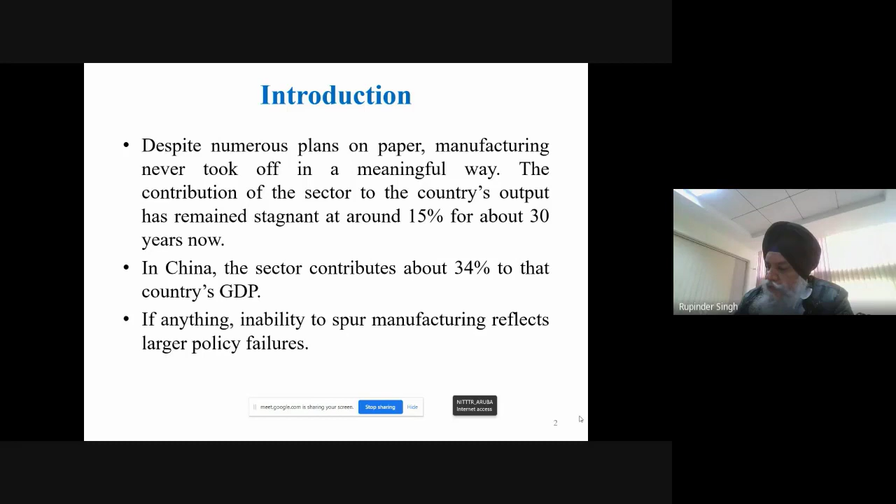And if we compare our country with China, the contribution of the manufacturing sector in GDP is around 34%. And the problem is not new. A lot of efforts have been done, but still from past so many years this problem is there. And what the website says, the Planning Commission of India, now called NITI Aayog, says there seems to be some policy failure. Actually, to overcome this, the Atmanirbhar Bharat concept has been there.

In 2004, Government of India set up a National Manufacturing Competitiveness Council, which was headed by a group of ministers. And in 2006 itself, the Prime Minister of India at that time also put his concern that the contribution of the manufacturing sector must increase from 12-14% to 25-35%.

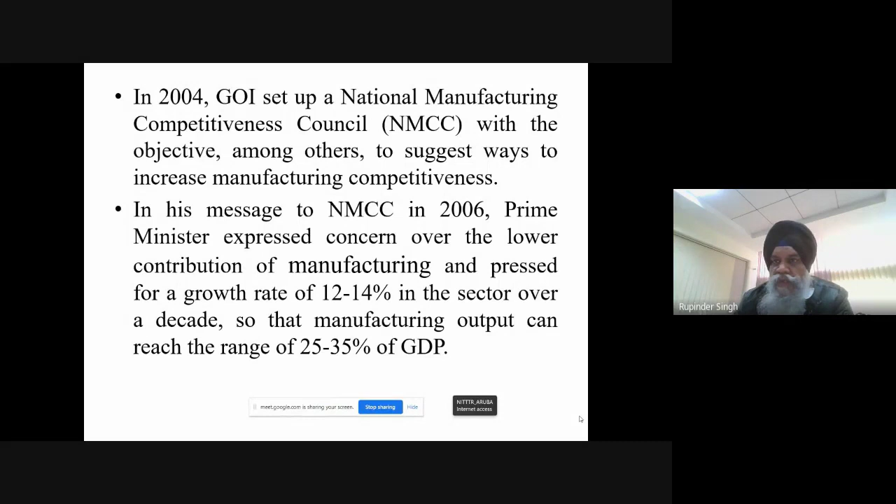And if I just Google the website, you will see that the target by Government of India for 2025 is around 25%, and still we are at 15%, right? So we need to work really hard to achieve this, right?

If you just compare in past 10 years or past 20 years, the situation is not improving. And why do we need this? If I am able to increase the contribution of the manufacturing sector from 15% to 25%, there will be 100 million jobs, specifically for the technocrat, right?

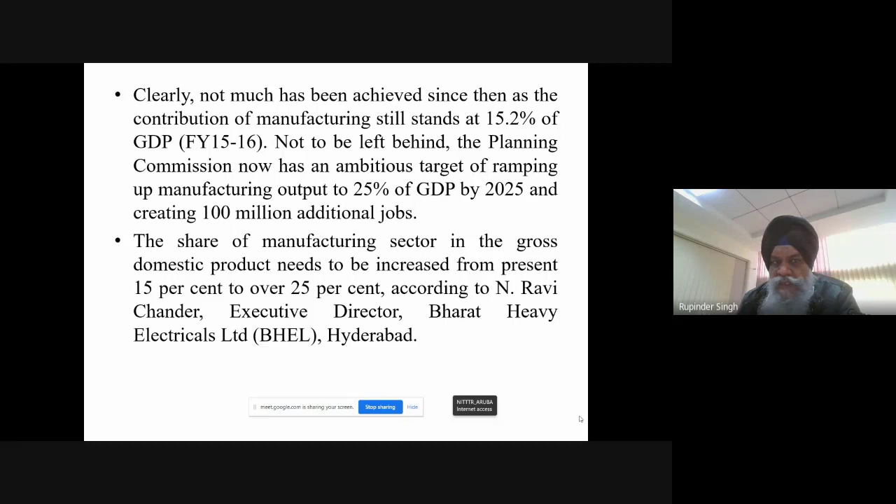So that is also one of the major concerns in our country. The job scenario is really alarming, and after this COVID period, a lot of things have to be improved. Even not only the government sector but also the private sector people are focusing that we need to do this. Like one quote I have put by BHEL executive director Ravi Chander, he is also saying similar things. Even some private sector people are also focusing on the same thing. Basically, we have to increase the contribution of the manufacturing sector.

That is the concern. Manufacturing sector doesn't mean pure mechanical manufacturing. It may be the manufacturing of electronic goods. We are interested in developing some sensors. We are interested in developing various medical goods and so many things, right?

But there are some issues in our country, like we have infrastructure problems, we have finance issues, we have problems with land acquisition, there are labor laws, and so many things hanging in the parliament. A lot of resettlement bills, a lot of things are pending. Now, what does this mean? Whether we should stop working, or we can have something which can help us come out of this situation.

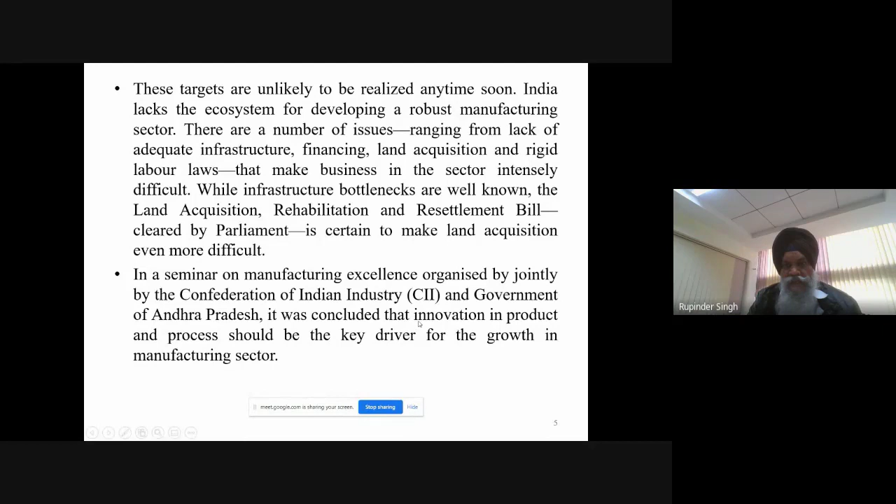So to address this issue, there was a discussion among various stakeholders, and in one discussion between CII and Government of Andhra, they came up with a very beautiful thing: that innovation in the product and the process should be the key driver for growth in the manufacturing sector. Now, this innovation in product and process...

This is basically the key point for our discussion, from where we came up into the area of veterinary. If we are able to do this, there will be ample jobs for our countrymen, and this will help us come up with a lion's share in the market.

Now, why are we discussing this? After the National Education Policy 2020 was launched, there is a lot of opportunity to work in the area of multidisciplinary or interdisciplinary research. That is what is some tool or help by the regulatory bodies in our country to think out of the box for solutions which can be really innovative, which can help in product development, coming up with new product ideas involving different disciplines of people, and then launching that product first in the market, so that it has some marketability.

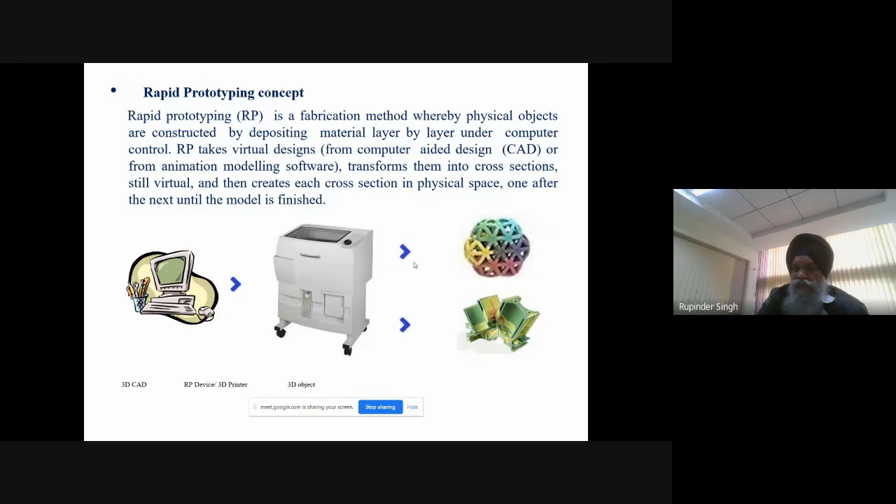So this is a fabrication method where we get physical objects constructed by depositing material layer by layer, under computer control, which is of course virtual, and I get the final object in physical space, one after another.

This is another way of understanding 3D printing: I am putting layers successively, material which may be melted or partially melted, on a build platform to get a 3D printed part. I think this is a very traditional definition, and many times we have seen this, that I am interested in building some part layer by layer.

Now, this part may be of a polymer, it may be in the form of biogels, or it may be in the form of metallic powder. The joining mechanism may use some adhesive, it may use melting through some laser, or maybe some binding action.

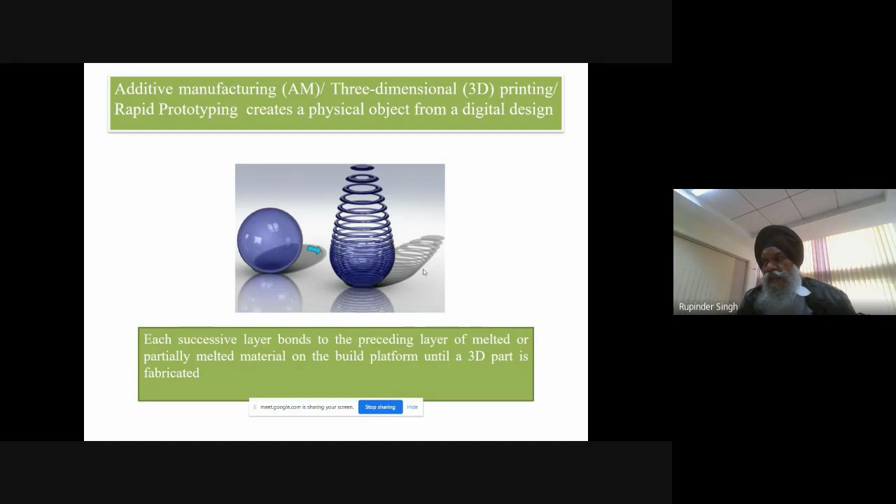Now, if I am really interested in medical applications, specifically for veterinary or human applications, there is one additional step that is required. That is basically the idea of 4D printing. I am interested in some self-actuating type mechanism which can help in the controlled growth of these types of 3D printed functional prototypes.

So to understand this, what is basic about 4D printing? I am basically printing a smart material. Now, what is a smart material? A smart material is something which can change its physical state, maybe after solidification. Here, solidification means the 3D printed part, and once I give some stimulus to it, that material changes some of its properties, and the effect of the stimulus is reversible. Giving some stimulus in some form, I get a controlled environment, and if I reverse the stimulus again, I get repeatability.

Now, to put my point in a more simplistic manner, let me give an example. All of us have seen a sunflower. A sunflower always faces towards the sun. Once there is a sunrise, the sunflower moves up. Once there is a sunset, it faces down. And as there is a movement of the earth around the sun, the sunflower also has a similar rotary movement. That is what we observe in nature. So that means there is one stimulus, the sunlight, which is basically actuating some mechanism.

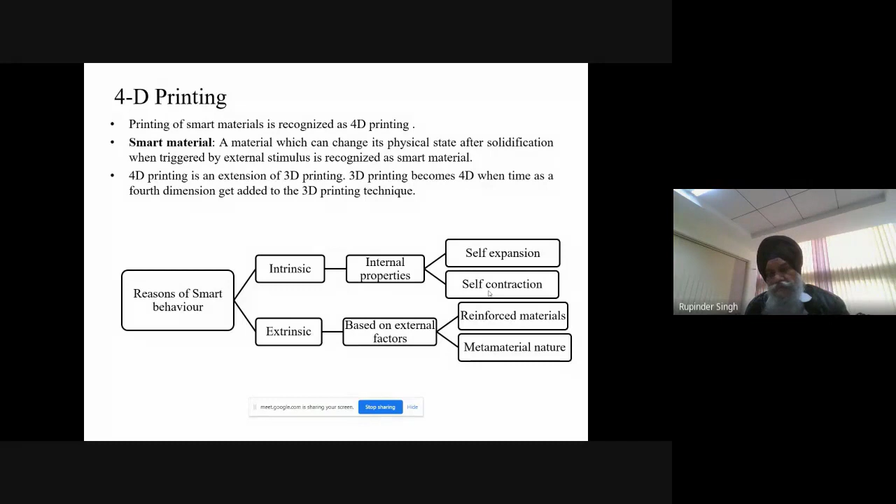So here, self-expansion and self-contraction may occur through some stimulus, maybe in the form of an electric field or a magnetic field—people are working on this. Then sometimes we are interested in adding some property from the external side, so we call it the extrinsic property. This can be through reinforcement, with reinforced materials or metamaterials. For example, if I want some electrical property, thermal or electrical conductivity in that implant, I can think of reinforcing with aluminum powder, copper powder, or graphene powder, depending on the application.

One of the recent concepts in 3D printing, specifically in bioprinting, is the use of metamaterial type structures. To understand this metamaterial structure, we have to follow some civil engineering concepts. Like in a typical strength of materials class, we learn about the concept of trusses in railway bridges. In a railway bridge, there are a number of links, and the angle of the truss is important for reducing the section of the solid part. So what's important is the length of the link and the angle of the link. If I'm able to manage that, I can reduce the section of the railway bridge.

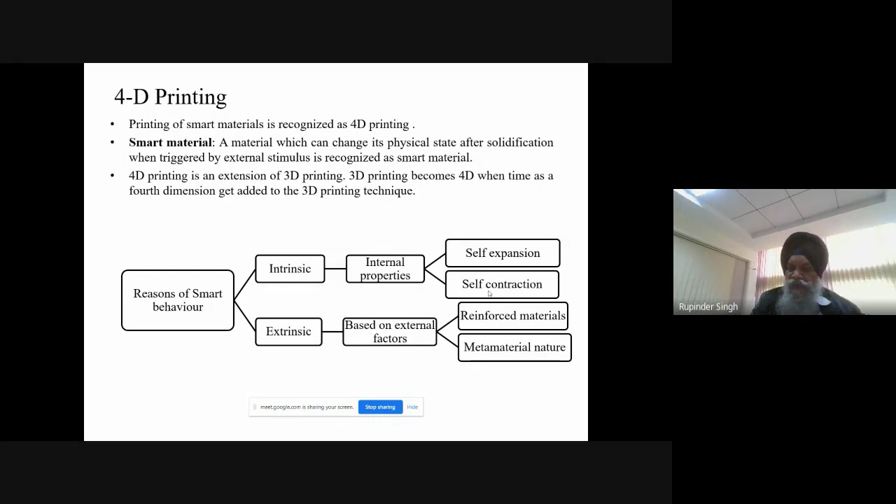Now, a similar concept applies if I'm interested in developing hard tissues through printing, where my job is to reduce weight. Similarly, when working on printing implants specifically for veterinary or human patients, the weight should be minimum. So we can think of using this type of metastructure. In a metastructure, the property I'm getting is not because of the inherent property of the material, but the length of the link and the angle of the link is really important to give the desired property. That is one of the really upcoming fields.

And then we can think of programming this type of smart material. It can be one-way, like your material is in state A, you give some stimulus, it comes to state B, another stimulus brings it back to state A—that is one-way programming. Then there can be two-way programming, like stimulus on, stimulus off, you can change the state, as in the example of the telescopic leg with the magnetic field. Then it can be multi-stage programming, from A to A1 with one stimulus, A1 to A2 with another stimulus, then A2 to A3 or something like that, but it should be a closed loop.

So that is really important in this type of programming.

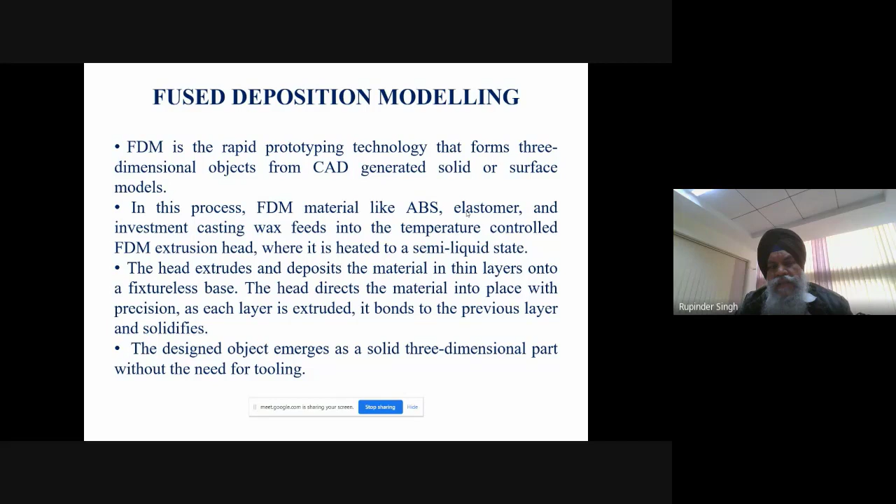Before I talk about tissue reconstruction, one of the very low cost technologies that is very commonly used is fused deposition modeling. I think most of us know about this process, but let me explain, because this is one of the cheapest, most cost effective technologies.

Through this process I can make smart materials for different types of tissue reconstruction. The idea is I have a spool of thermoplastic material which is fed to a zone, where I force this feedstock filament, in the form of wire, through a mechanical drive, and it enters the region I call the liquefier.

Here there is a temperature range, maybe varying from 150 to 300, but people have worked on quite different ranges, maybe from 50 to 500, depending on the application.

Then I have a nozzle through which this larger diameter wire comes out as a very fine wire. Normally the input diameter of the wire is 1.75, so once it comes out, it is to the tune of 0.25 or sometimes 0.1, this type of dimension. So the wire feedstock filament is forced into this liquefier zone through mechanical drives, and at the nozzle, larger diameter is converted into finer diameter.

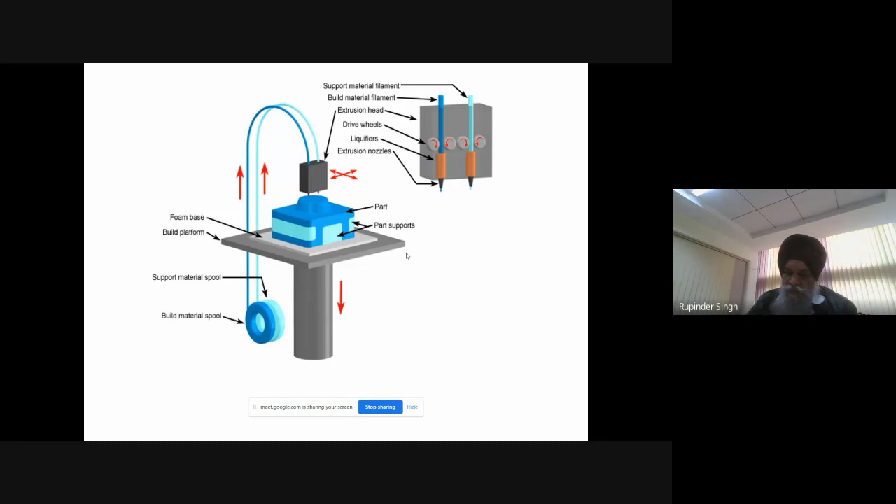Now here we start with the actual collaboration of mechanical engineering with veterinary science. So what is the problem? This is one of the first case studies that I want to share with you in hard tissue printing.

In this case, what we have done is we prepared a feedstock filament of polypropylene reinforced with calcium carbonate for hernia tissue reconstruction in case of bovine. Bovine is basically cows or buffaloes, these are called bovine.

So we are interested in hernia tissue reconstruction, that is the problem. Typically, if I talk about hernia, this is specifically abdominal hernia. This is very crucial in veterinary patients, and specifically in case of cows, their health is affected. Finally, the milk production is really affected.

In this part of our country, we are really interested in dairy farming, so a lot of people are working on these types of animals, and this hernia is a very common problem for these bovines.

To solve this problem, polypropylene mesh in hernia treatment is a very common approach. But what we have observed from the literature, if I reinforce calcium carbonate, which has anti-inflammatory effects, this can be really useful in the treatment of hernia. Till now, no one has developed a mesh with reinforcement of calcium carbonate and polypropylene, which can be really useful for the long term treatment of hernia.

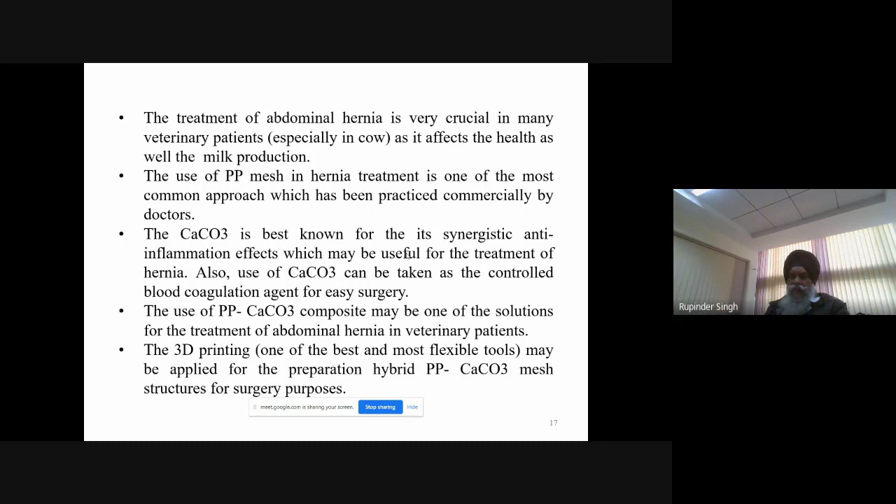Since we know that 3D printing is one of the most flexible tools that can be used for the preparation of these types of mesh structures, now here we will come to know. This is a typical example.

Here there is an abdominal hernia in case of a cow. What actually we do is by surgery, the extended part, which is more or less a dead part, is cut, and we put this type of polypropylene mesh inside, and then we do the surgery.

And finally, with the outer skin, we are interested in doing the suture over here. We observed that for these type of animals with an average life of 10 to 12 years, this polypropylene mesh is used, and sometimes people also use polyamide, but most common is polypropylene mesh.

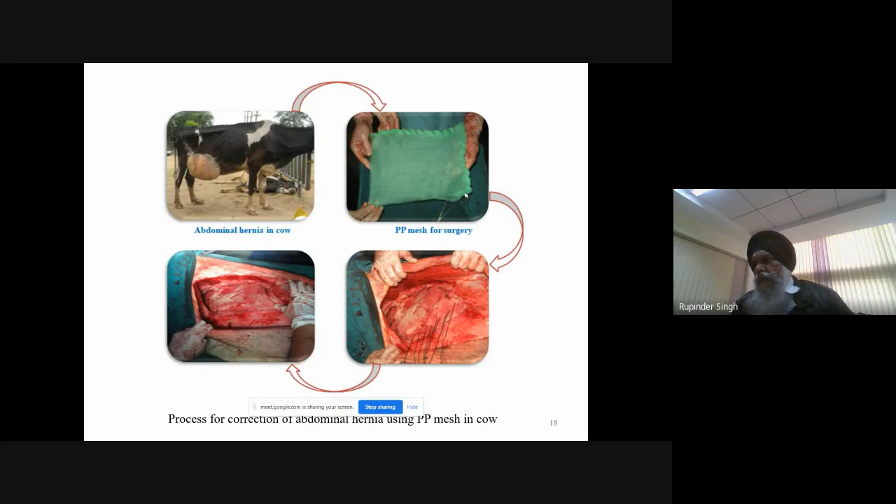So what is our contribution right now as a 3D printing engineer? If I can have this type of mesh which is 3D printed, consisting of CaCO3 along with polypropylene, the strength is greatly improved for this composite. Second, if I'm using this composite of polypropylene and CaCO3, the anti-inflammatory effect of CaCO3 helps in controlling the hernia in a big way.

Based on these clusters, we came to know what sort of research work has been done in the past, and then focused specifically on the polypropylene matrix. We found that for polypropylene, people have worked on strength, DSC, SEM analysis, TGA analysis, XRD analysis, FTIR analysis. These things have been done, but no work was reported on using the anti-inflammatory properties of calcium carbonate with the PP matrix. So we tried to explore this.

This is the flow chart: collecting the polypropylene and calcium carbonate, then checking its MFI, the basic rheological property, done as per ASTM D1238.

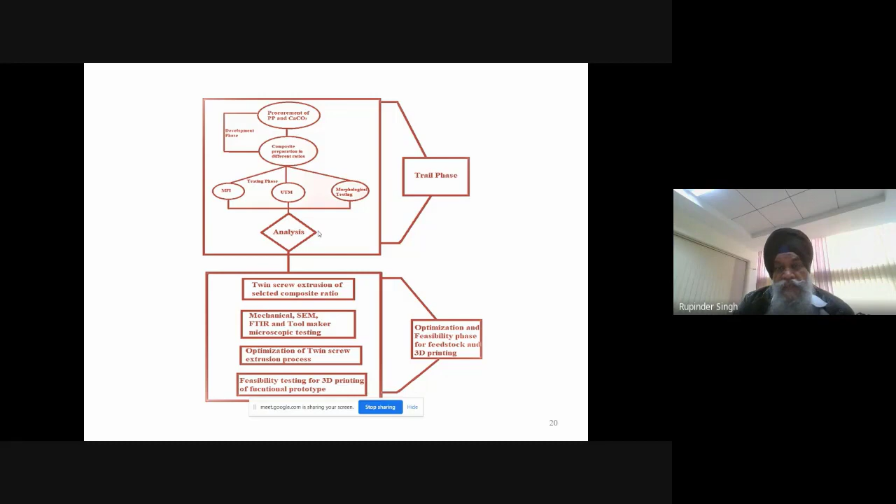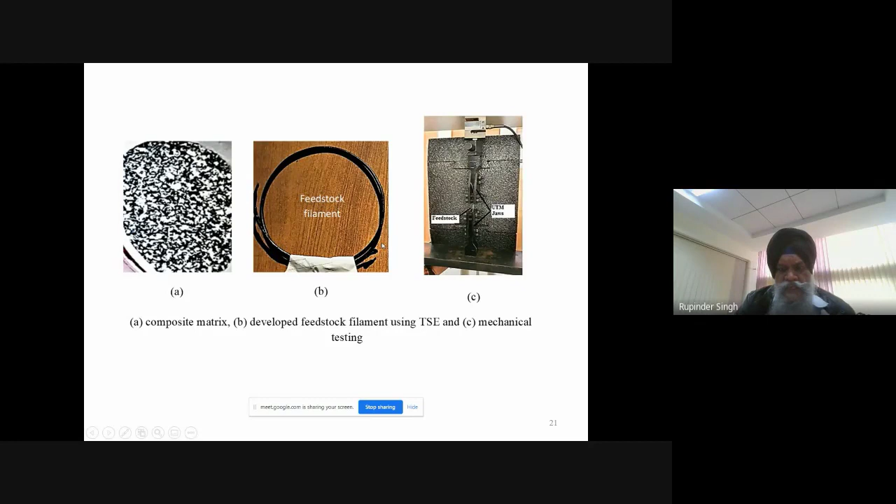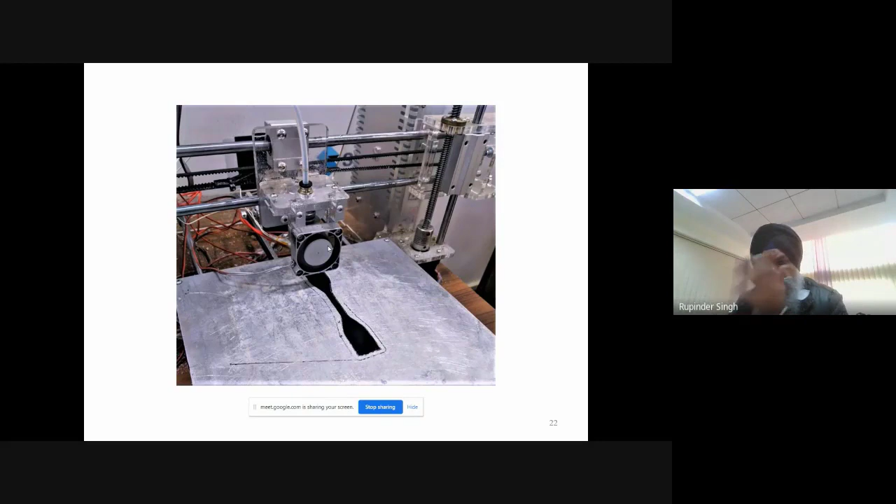So these are some graphical representations. This is the composite, this is the feedstock filament. Some testing, and you can see some printing going on here in the form of tensile coupons, compressive coupons, for flexural property. And if I'm interested in some torque application, that can also be created. We used just an open source FDM based 3D printer to print this type of composite.

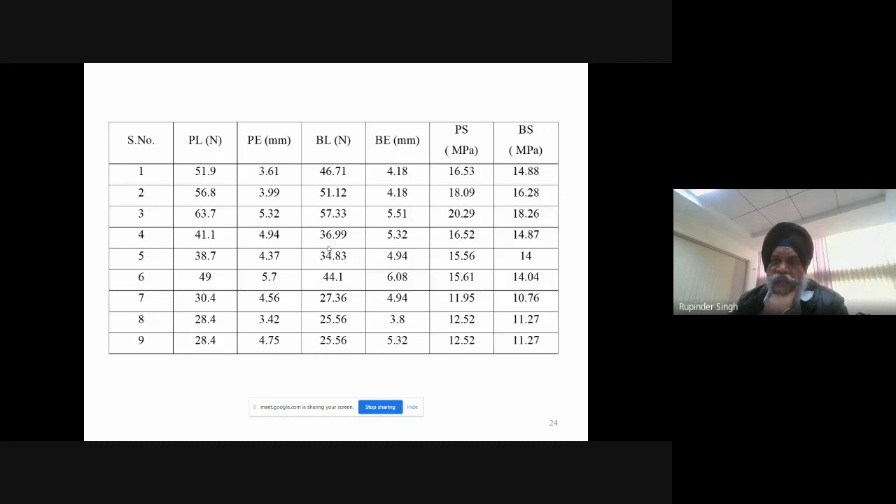So these are some results of the mechanical testing in terms of stress strain diagram. We tried to observe, using some DOE, the peak load, peak elongation, break elongation, peak strength, break strength, and then checked their porosity and surface roughness.

These type of controlled conditions, as per the existing commercial solution, we were able to provide. Now here are two important things to be noted. One, I am interested in hernia tissue reconstruction. This is a very common problem in milking cows, managing the hernia. The commercially available solution is polypropylene mesh with little or no support for anti-inflammatory property, so that has been added into the mesh of polypropylene in the form of CaCO3.

Try to make its composite with the maximum allowable percentage, doing some in vitro and in vivo analysis, and based on that, preparation of the feedstock filament, preparation of the mesh as per the design as a customized solution. So what is the size of the tissue that we want to reconstruct or remove in a systematic manner, and then printing, and doing its porosity analysis, mechanical analysis, thermal analysis, morphological analysis, its surface finish. These type of things can be done.

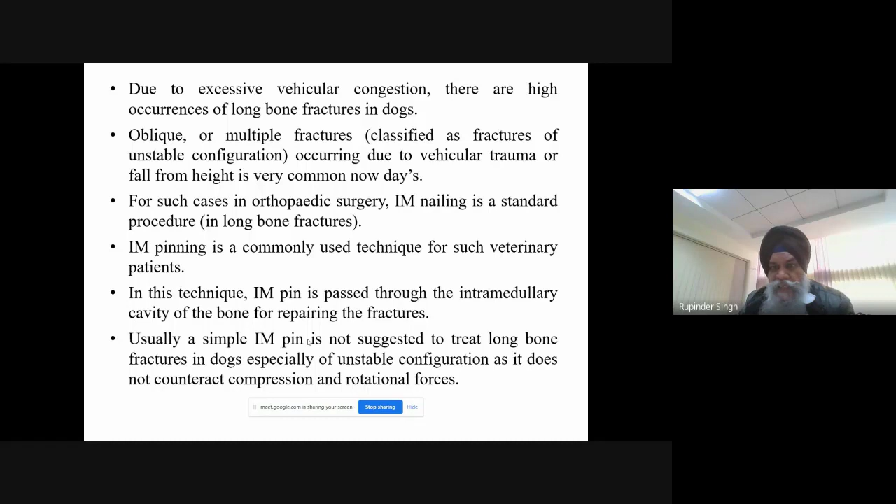To solve this problem, people are working on the improvement of these type of intramedullary pins. So for long bone fracture, the intramedullary pin is not a very good solution, because it may not be good in case of compressive load, and once we have rotational instability, these fractures can be unstable, specifically if I am using a static or rigid fixation technique.

People are working on bone plating and intramedullary interlocking nails, but the problem with these solutions is that we are not following the principle of biological osteosynthesis, which emphasizes that fixation should be attempted in a minimally invasive fashion so that soft tissues at the fracture site are preserved to the extent possible.

Osteosynthesis is a complex process, specifically for canine long bones, as it requires knowledge of biomechanical principles, biology, and surgical techniques. It has been reported that bone plates have a better success rate, to the tune of 91%, as compared to intramedullary pinning, where the success rate is 64%.

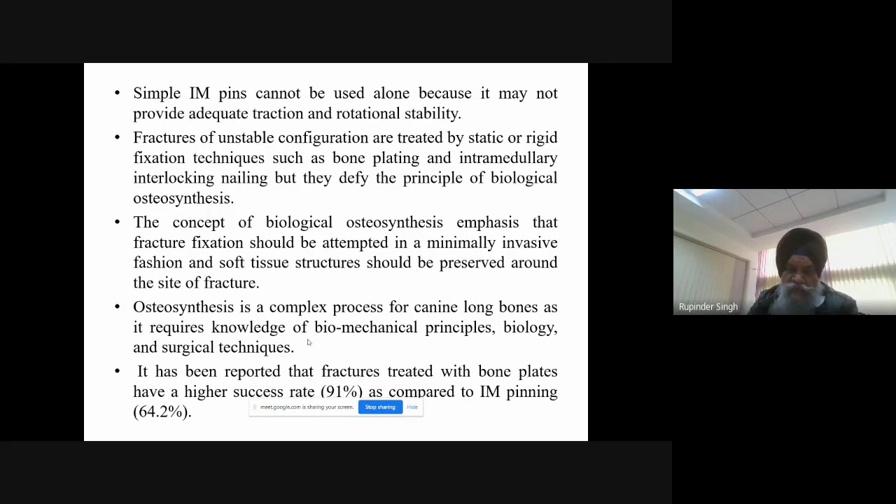But intramedullary pinning has some advantages: it helps in osteosynthesis, provides less destruction to the soft tissues, and gives less rigid fixation compared to plates. A bridging plate can also help in this way.

It has been reported that in the case of mandibular condylar fracture, titanium-based intramedullary implants have more strength and stiffness than mini plates.

The end-threaded pin, one of the solutions used in this case study, is a modification of the Steinmann pin that is actually used commercially. This threaded portion in the end-threaded pin provides better holding of the pin in the distal end of the bone. As shown, when inserting the pin from the top and it reaches the distal end, this helps provide better stability.

So intramedullary fully threaded pins provide good rotational stability if threads are provided on the distal end as well as the proximal end. Unthreaded pins can be modified with different threads.

People are working on positive threads with various thread profiles like V, U, and square threads. Positive threads can be used on the proximal end for better holding, and this may increase the retention rate.

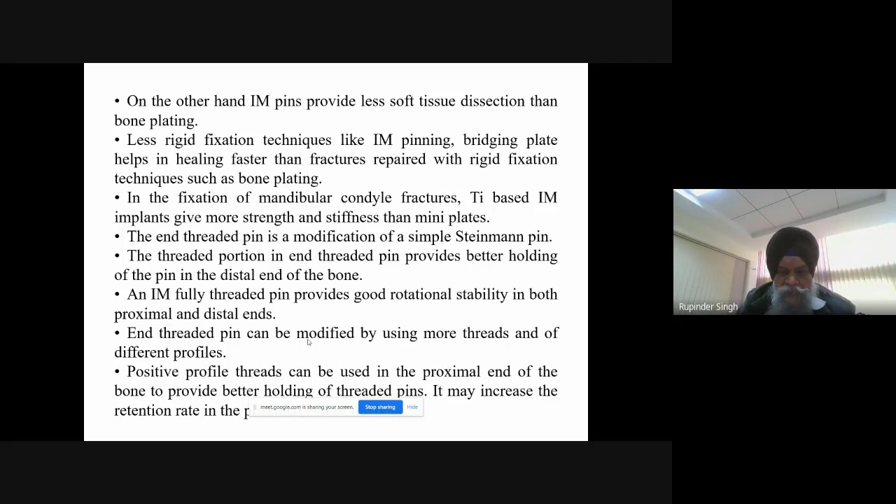Since there is no link, no significant work has been reported in this specific area. There is a lot of potential to do work here, so based upon this, we tried our own methodology.

First, selection of the subject - the patient was selected. Then CAD modeling of the innovative intramedullary pin profile, focusing on a typical design for the intramedullary cavity.

Since this part is going inside the body of the patient, we needed approval from the veterinary side. For that purpose, a thermoplastic print was first made just for demonstration, and after the pin profile was selected by the surgeon, we printed it on a metal printer.

On the metal printer, we have parameters like laser power, scanning speed, and layer thickness that we can optimize. In this case study, we used DMLS, direct metal laser sintering, as the process for developing these intramedullary pins.

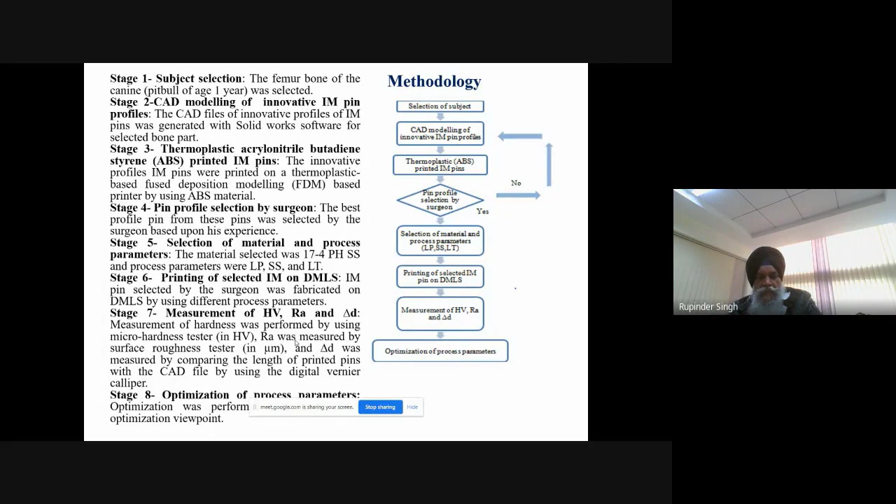So in one of the examples - yeah, am I audible, please? Am I audible? Am I audible? Yes sir, your presentation and voice are also audible, sir. Okay, great, both are correct. Okay.

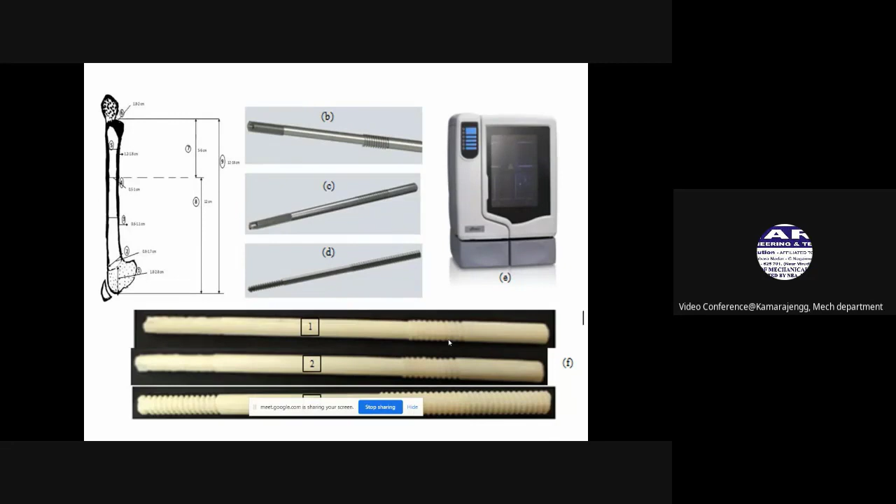So in this case, what you can see on the proximal end and distal end, we tried different pin profiles. In one example, case one, the threaded portion is here only. Then in the second case, some thread is here and some threads are here. In the third case, this is a very long thread.

Basically, the idea is for these intramedullary pins that we are using in preserving the hard tissues, the length may vary from say 15 centimeters to 22 centimeters. So we provide a solution with a long threaded region, and up to the length required we insert it, and the rest is cut by the surgeon during surgery as per the requirements.

So in the first case, the thermoplastic based pins were printed on this FDM printer. This is a uPrint, US based printer. Once we got an okay with the surgeon, we printed the different pins on a metal 3D printer. This is the final design that has been approved in our case by the surgeon.

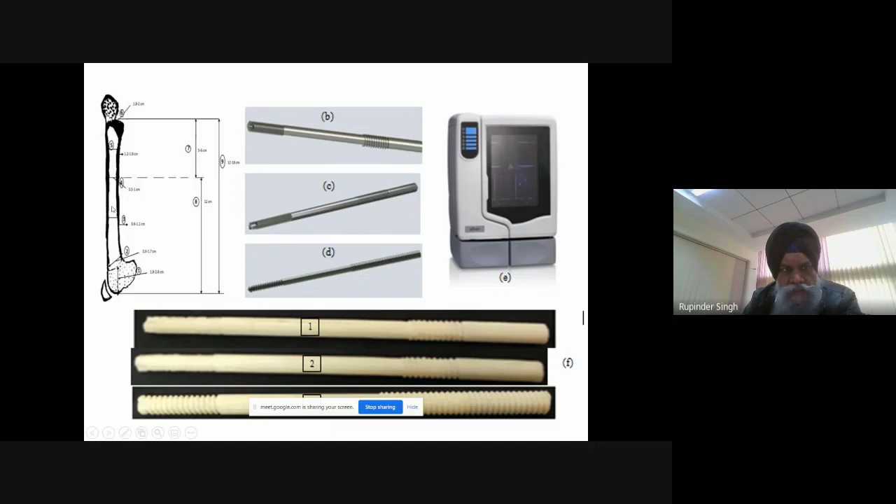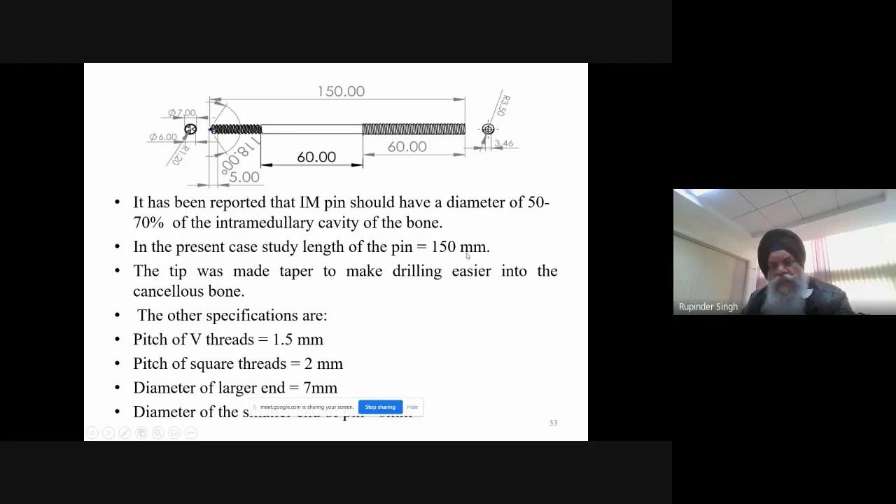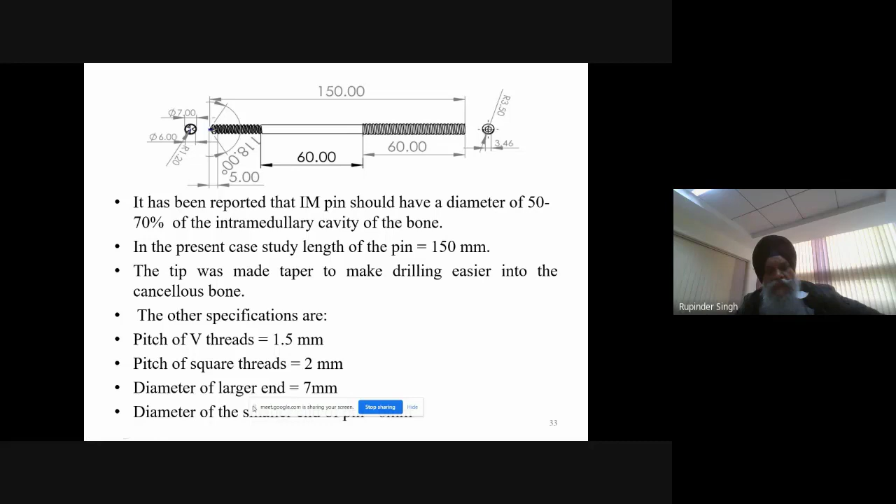So in this case, a 150 length pin was printed. We selected some of the threads, like for the V thread, the pitch was selected. Then the diameter of these pins was determined, and we used fabrication via direct metal laser sintering to prepare these intramedullary pins.

So we used 17-4 PH stainless steel. An STL file was there, with inclined wall support, and some laser power, scanning speed, and layer thickness were used. For metal printing, you have a selection of materials - as a commercial package, we have nickel based alloy, titanium 6Al4V, and stainless steel. But this is an open source machine, so anybody can have a different combination for printing different biocompatible materials. One limitation is only fine 20 micron, 30 micron size is the minimum requirement for the powder.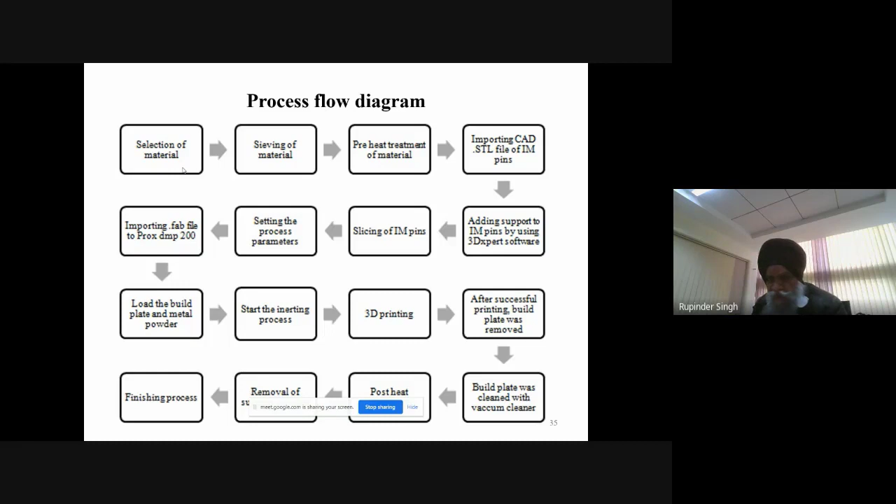So we do the sieving, then pre-heat treatment, then import the STL file, then add support, slicing, and go for the process parameters. The software helps generate a .fab file, which goes to the printer - in our case, a 3D Systems printer. So we load the part, start the inerting process under the inert environment, and begin printing. After successful printing, the build plate is removed, cleaned with the vacuum cleaner, post-treatment, removal of the part, and finishing. This is the basic flow diagram.

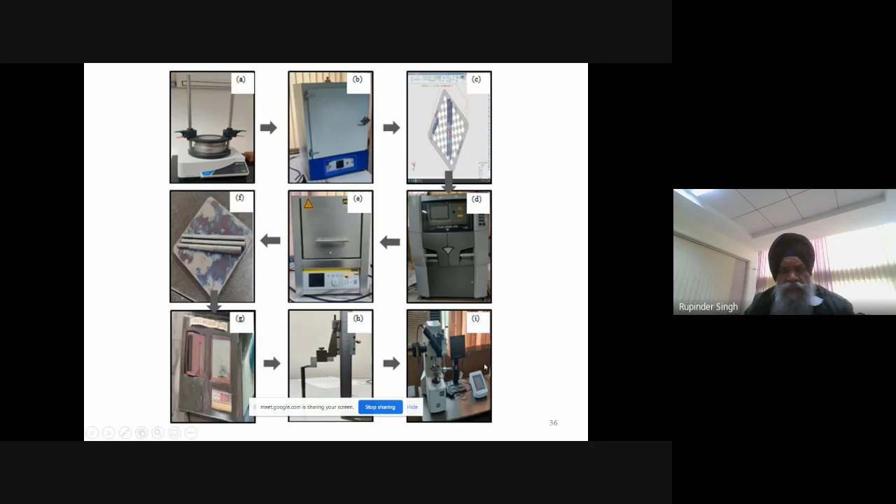So again, we can see this - sieving, some heat treatment. This is the build platform, this is the DMLS printer. Then some heat treatment, and here are some pins. Surface roughness measurement, dimensional measurement, and hardness measurement data have been taken for this type of material.

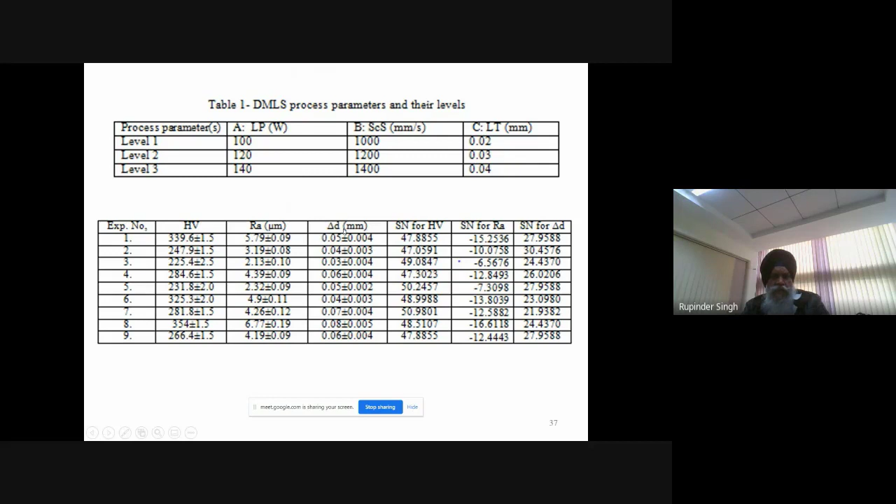These are some of the parameters like laser power, normally 100 watts, 120 watts, 140 watts, scanning speed, layer thickness, measuring parameters like hardness, dimensional accuracy, and surface roughness, going for their signal to noise ratio, and then multi-factor optimization. These standard statistical tools we have performed.

Now what is important here is I am interested in preserving the natural tissues, basically the hard tissues, which is bone in this case. For that purpose, I am using a threaded pin. So just imagine the surgeon can insert this type of threaded pin from the proximal end. Once in the X-ray I find that in 10 to 12 days there is total proper bone growth, I can remove that part, and the patient recovers very fast. So a minimally invasive surgery type situation can be achieved.

And we try to correlate the mechanical strength, the morphological property with their grain structure and the porosity part. So this is the second case study.

Now this is the third case study that I want to discuss specifically in case of the veterinary patient. This is again on the dog, and we are interested in preparing some of the strategic teeth of the dog and the implants for these type of dogs. This can be done through additive manufacturing.

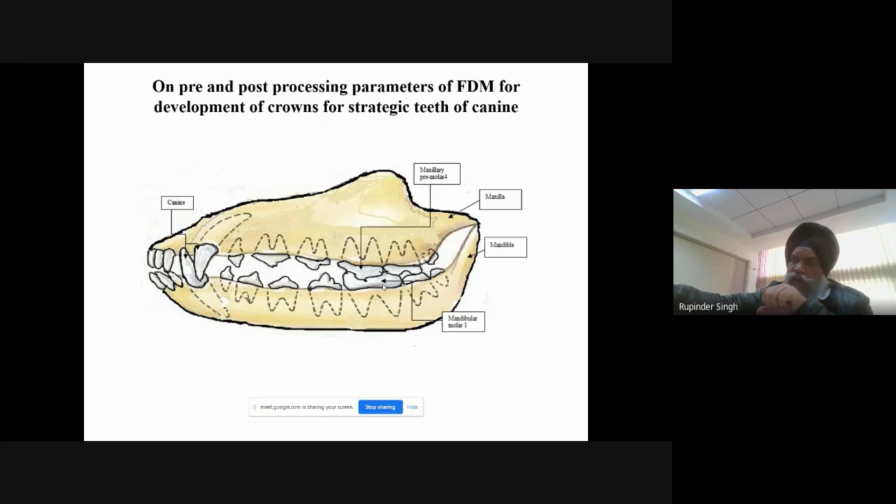So for these narcotic and defense applications, what actually we are interested in is, once the dog basically judges that there is some issue, some antisocial element is there, there is a chance that there can be some drugs in some packet. So what actually the dog is doing, they are basically trying to crush it, as a natural habit.

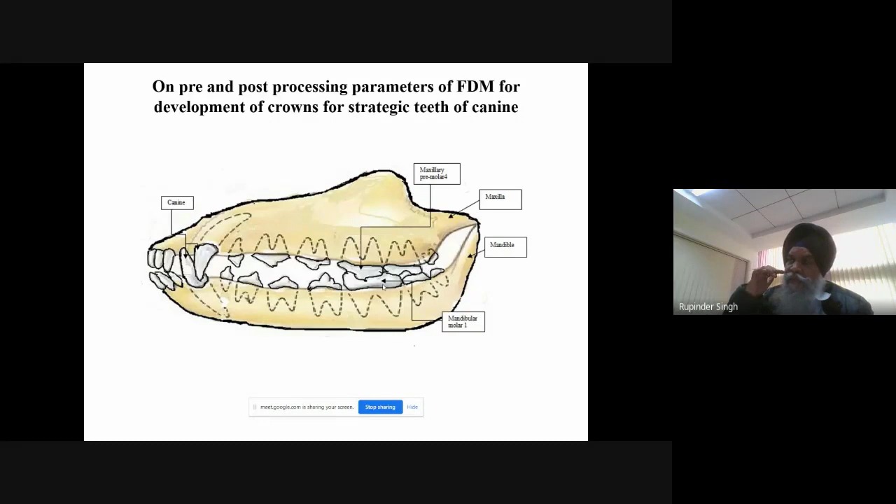And these antisocial elements, what actually they are doing is, they are having some sort of titanium shells covered around this. So what will happen, if there is a sudden bite force which is in the range of 800 newtons, there can be damage to the canine, there can be damage to the PM4, there can be damage to the M1. So what these DRDO people or BSF people are doing is providing an outer shell as a coverage to these type of strategic teeth.

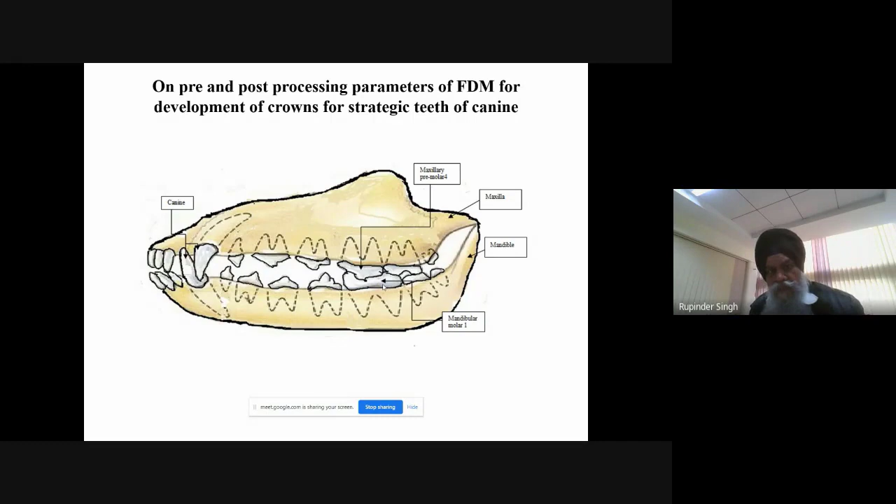So that is the work done in this type of work. This is under the prosthodontics area. So here we are interested in restoration and maintenance of the missing teeth with some oral structure by an artificial device. This also includes the cosmetic restoration and rehabilitation of occlusion with prostheses.

So if I see the literature, the prosthodontic treatment for veterinary patients, it may have inlays, it may have onlays, partial crowns and implants. Presently, we are really interested in using 3D printing in this area, along with some different areas also, for better clinical care of the orthodontic patient.

We have the CAD data. I can use CAD and CAM for basically having a better fit for various versatile functions for aesthetic looks using different CAD softwares. In case of dogs, these teeth require also a good appearance. They have to perform multiple functions like chewing, tearing. Then it can save them from external attack.

So it has been widely reported in literature that there is a partial or full loss of teeth. This is under periodontal disease. This may be because of trauma. This may be because of the accumulation of plaque or tartar, resulting in some gum infection, loss of bone, and the supporting structure. So people are working on using some crowns as a solution for these type of problems.

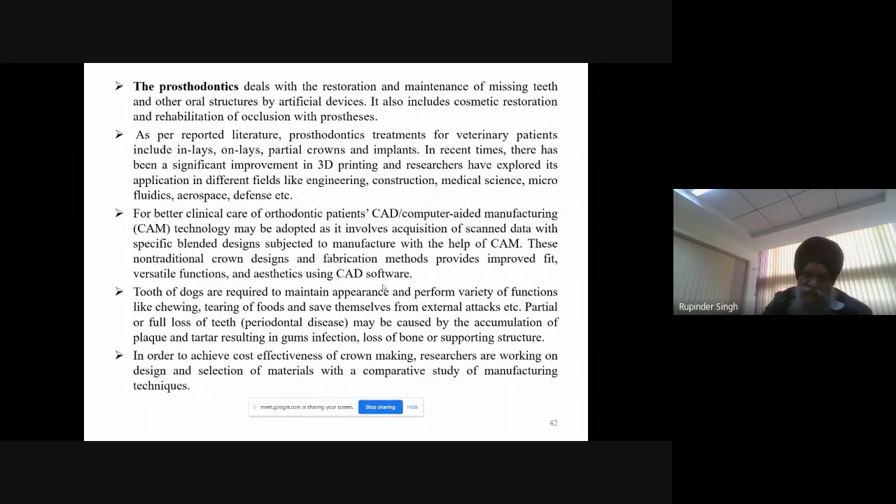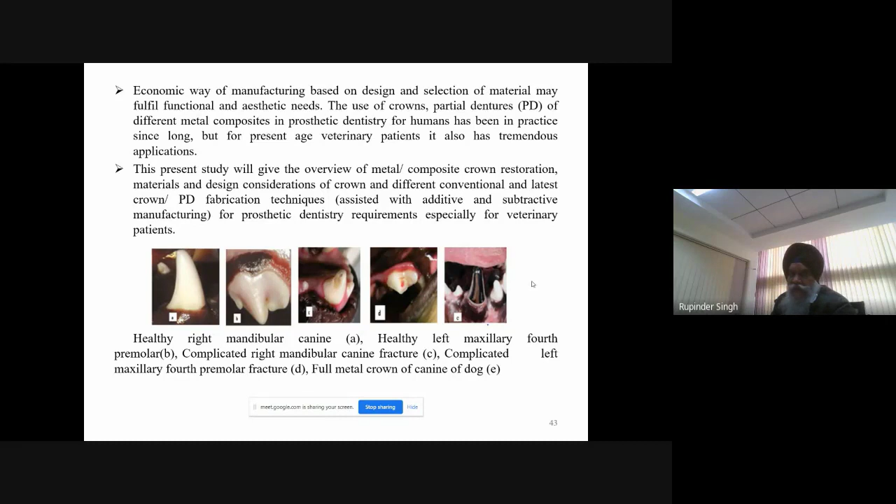So what we are interested in, using 3D printing, is to put some cap over here, like you can see over this. So that is the work that is actually going on in the area of these type of dogs, and we are really interested in putting some metal or composite crowns for the partial denture, basically for the restoration purpose.

So there are some steps. In step 1, I have the selection of the subject, so a 3-year German Shepherd dog was selected, and then some strategic teeth were selected. Strategic teeth involve canine, PM4, M1.

Then in step 2, I am interested in developing a die stone model. So under anesthesia, we take a dog impression on alginate colloidal, then dog biting as on the negative cavity, then dental gypsum stone to get the die stone model.

Then in the next stage, we have the development of the CAD model. So basically, by using a scanner on the die stone model, modification of the surface scanning to the 3D model, then virtual copying, and then final CAD model extraction.

Then based upon this CAD model, the next stage is obtaining a thermoplastic pattern. So using the CAD model for the strategic teeth, on the FDM printer, removing the support, getting the master. Then comparison of the dimension can be done with the die stone model.

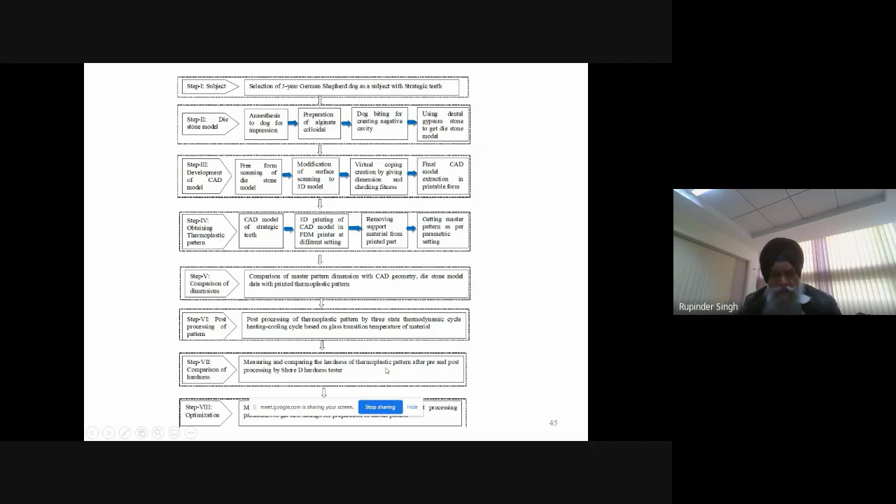Then post processing, we can think of different heating cooling cycles below the TG of that material. Then comparison of the hardness, do some sort of optimization, and finally in the optimization stage for the printing part, we can do different types of optimizations.

So in this case, you can see this is a dental tray over which we are taking this type of impression. This is an alginate, this is the impression that is there after the dog bite. These are the die stone models you are seeing for the different types - here this is for the canine, this is for the premolar, this is for the molar.

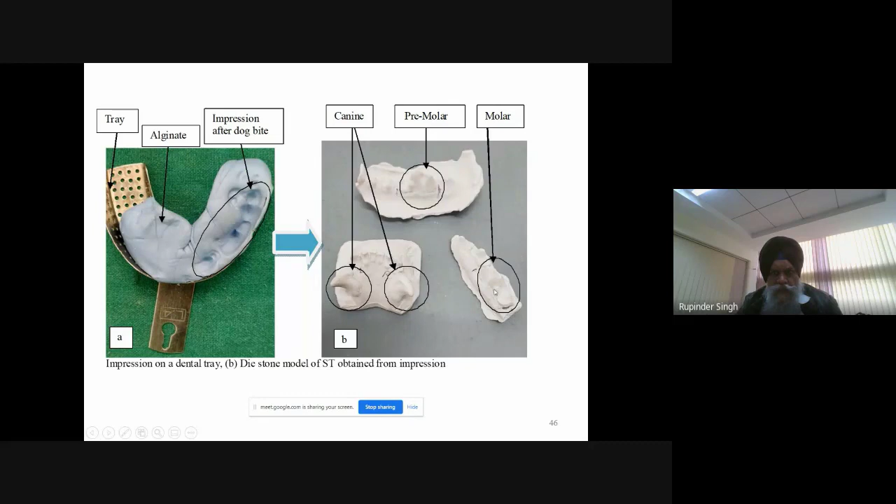Now here is a die stone model that has been prepared, and 3D scanning using this scanning software, basically the STL CAD file has been generated. So once I have a CAD file, I will import that CAD file into the FDM machine.

I can select the density of the part, the number of parts to be printed. I can do the scaling, then orientation, then again the slicing, number of files by cross-checking the build platform, and then clicking the print command, then the volume and the model of the support. Then we can estimate the number of layers, check the print option.

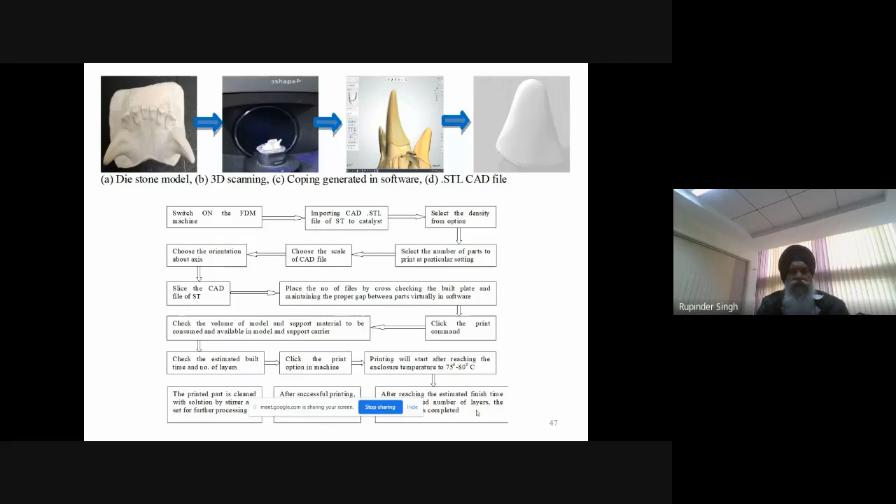Printing will start once you have a chamber temperature ranging from 75 to 80. Then estimating the finish time, number of layers, these type of things will be there. Then after successful printing, we will be removing the support, and then finally cleaning and uploading for further processing.

So these are some of the crown angles that we can basically control, and these are the different printing stages. Finally, by using some DOE, I can think of printing these type of crowns. Now these crowns can be printed through polymer printing and then go for investment casting.

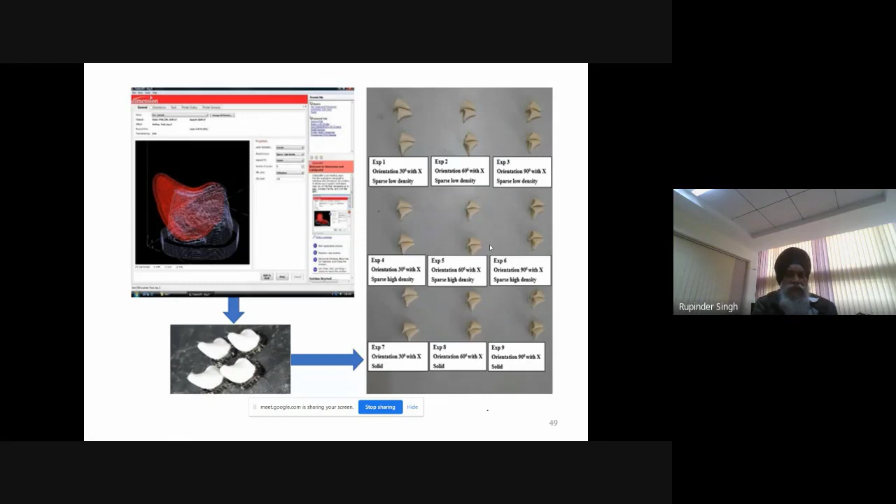Or in the second case, these crowns can be directly printed on a DMLS printer, the way I have shown in my previous example. Then for all these polymer printers, you can see, as this is 3D printing, the staircase effect is there. So we got the SEM image, and then their 3D rendering.

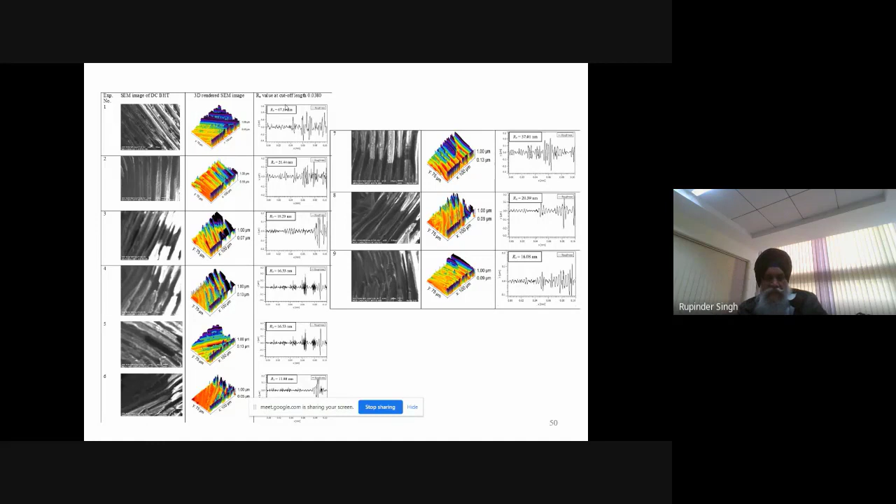And their surface roughness, because this is going to affect the final finish of the investment casting part also. So we can control this in a typical 3D printing application.

Till now, we have covered some of the things for veterinary. Now, this is another case, for human dentistry. Here, for the hard tissue printing, we can think of using nano HAP.

We can use FDM assisted investment casting for printing this type of material. So what we did is we collected eggshells. Eggshell is a very good source of nano-based HAP particles. It is reported that this hydroxyapatite, HAP, has 96% similar composition to that of human teeth. So we collected eggshell, which is basically kitchen waste, then crushed it in a cryogenic environment.

And prepared our own nano-based HAP material, which was reinforced with ABS. Once it was reinforced, we prepared our own feedstock filament for the FDM, and prepared the final master patterns, and then we did the investment casting.

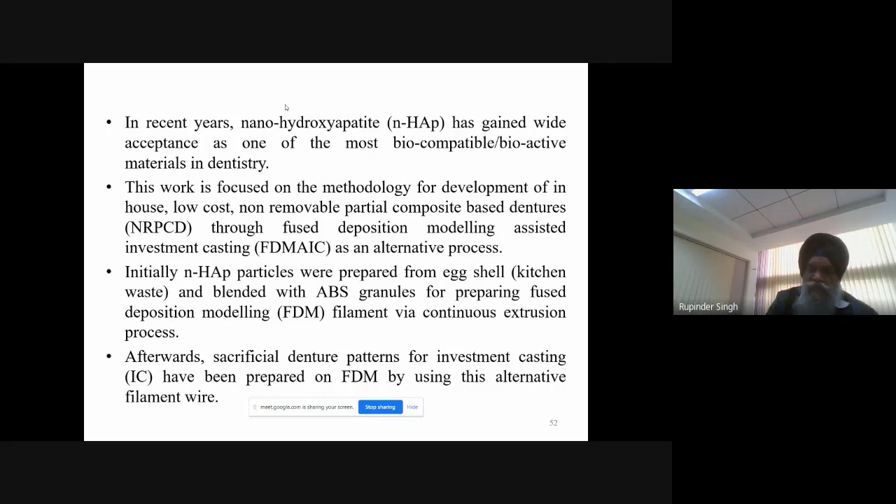So that is what I am calling the FDM assisted investment casting approach for preparing dental crowns. That has been used in this case. We can think of using a cobalt chromium based alloy or nickel chromium based alloy, and that can be used for preparing a partial or complete denture.

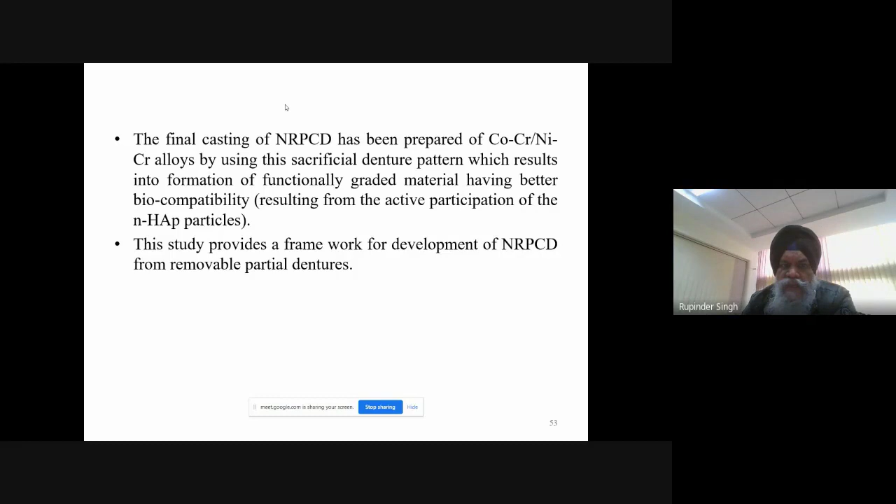So these are some historical things about partial dentures or complete dentures. It has been reported that in the 7th century BC, people worked on this in Italy for the development of these type of dentures. Then in the 16th century, people reported in Japan use of wooden dentures, and one paper by Donaldson reported that people used even animal tooth for preparing dentures. Then in 1820, as per the report, people used 18 karat gold for preparation of teeth.

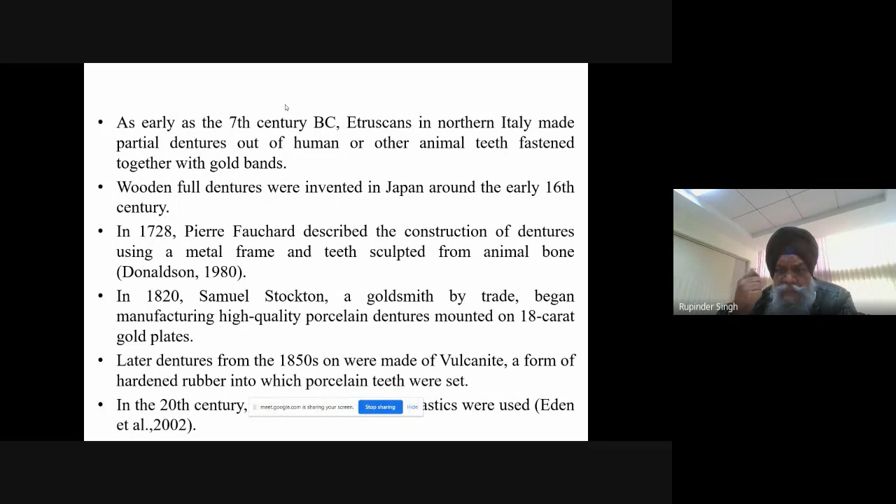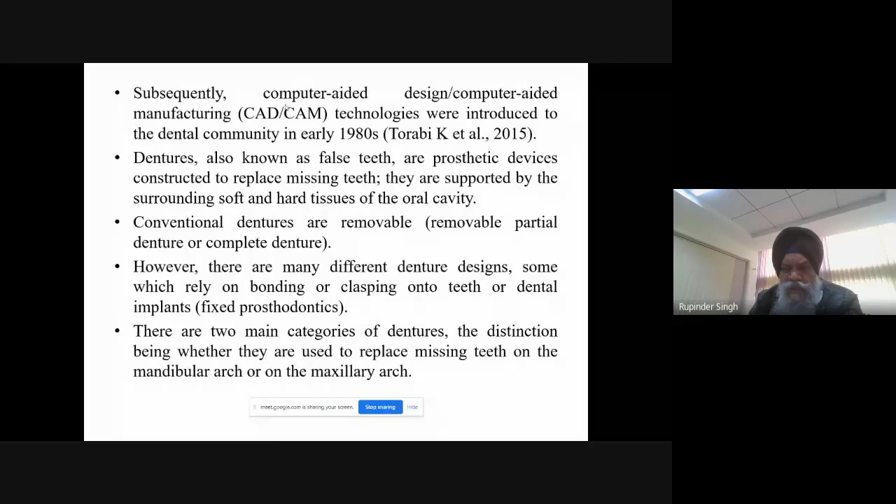And then vulcanite rubber has been reported. In the 20th century, as per the paper by Eden, people reported use of thermoplastics also for this type of denture. In one paper by Torabi, it has been reported that since the 80s people are using CAD CAM for dentures, removable or non-removable type, for the mandibular as well as the maxillary arch.

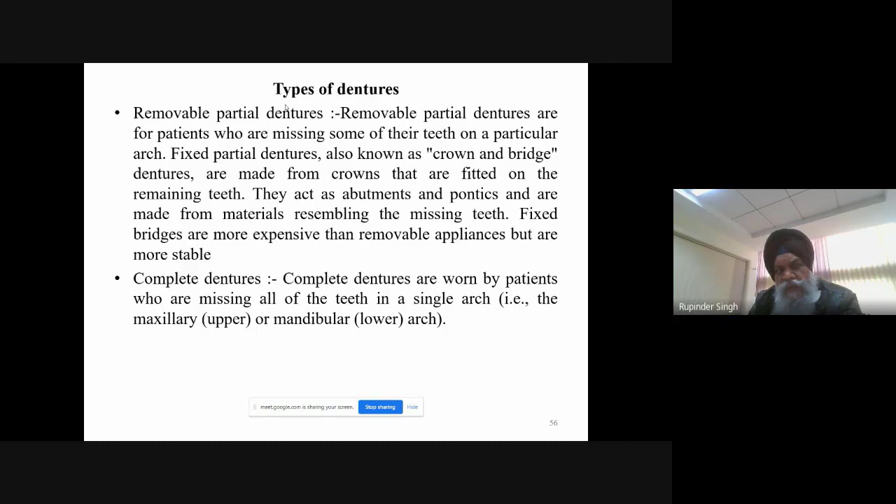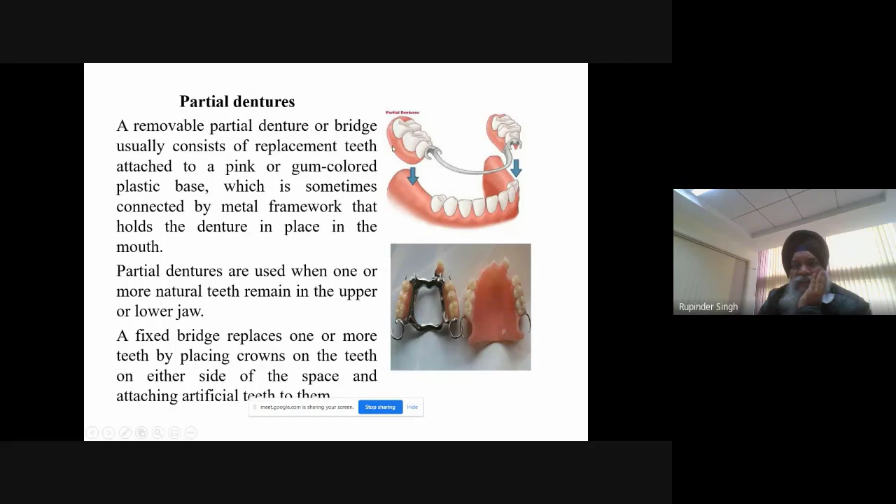So dentures can be removable for humans, and it can be partial non-removable also. Then it can be complete, or it can be the partial denture. Like you can see in this case, some part is there, some part is missing. So this is an example of a partial denture, right? That can be one of the interest areas for some of us.

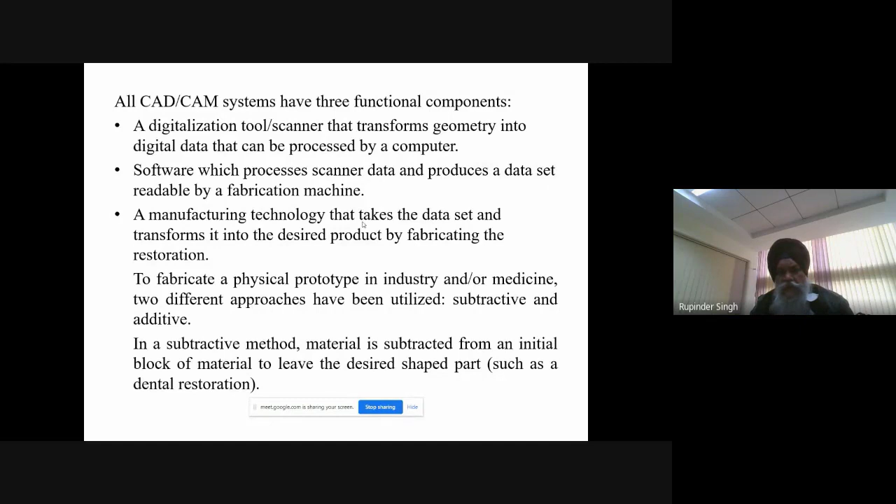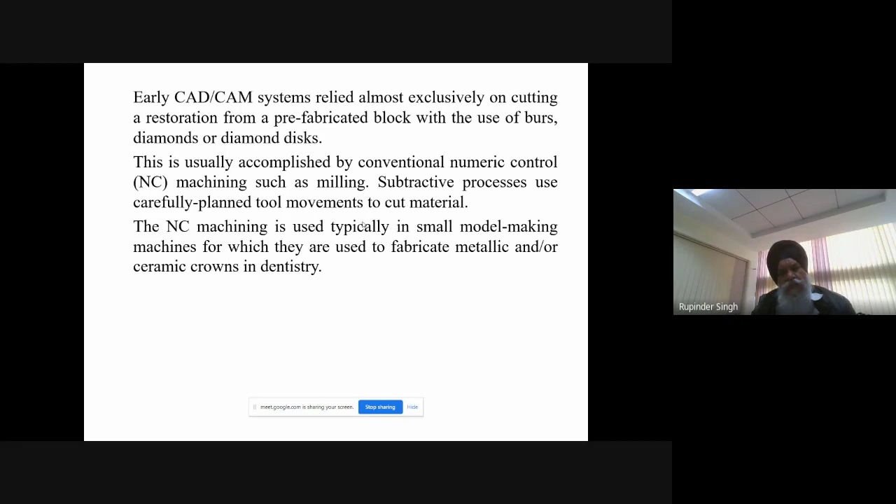So if I talk about the use of additive manufacturing, I need a digitalization tool for the CAD/CAM data. I need software which can process the scan data, then manufacturing technology for printing these type of parts. Then CAD/CAM system can be really used, and finally sophisticated NC machines like milling, subtractive, or additive manufacturing I can think of.

Then there can be another way. Again, you have a CAD file, again verification of the data, but now I'm not interested in subtractive manufacturing, I'm interested in additive manufacturing. And then the third case, the traditional one, manual wax model and investment casting. So all three techniques are quite common for the simple cases. The traditional wax models are very common.

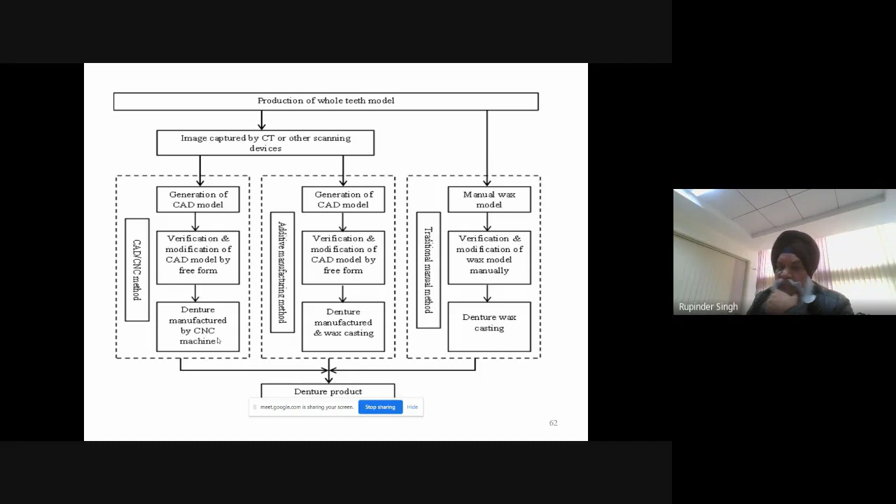Commercially in a country like India, this subtractive based investment casting using CNC is also there. This is also one form of prototyping, but for complex cases, additive manufacturing is the only solution. So how to do this?

In this particular case, we were interested in reinforcement using abrasives, that is ceramic particles, nano particles, into the ABS matrix, because I am going to use a lost wax type process. So I can think of non-biocompatible material also, because finally I'm going to use this as a quaternary recycling process.

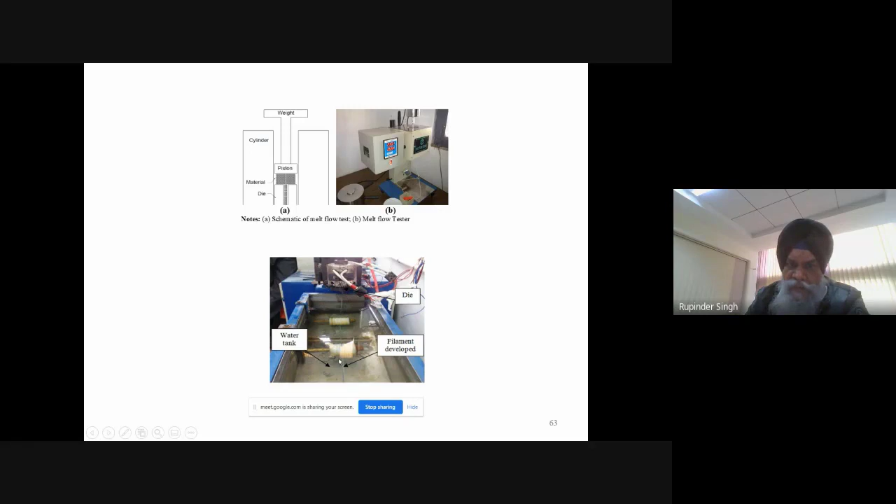So MFI was ascertained, and then extrusion for preparing this type of feedstock filament, and then some printing going on. You can see these type of dental prostheses have been prepared. I think I have discussed all these observations.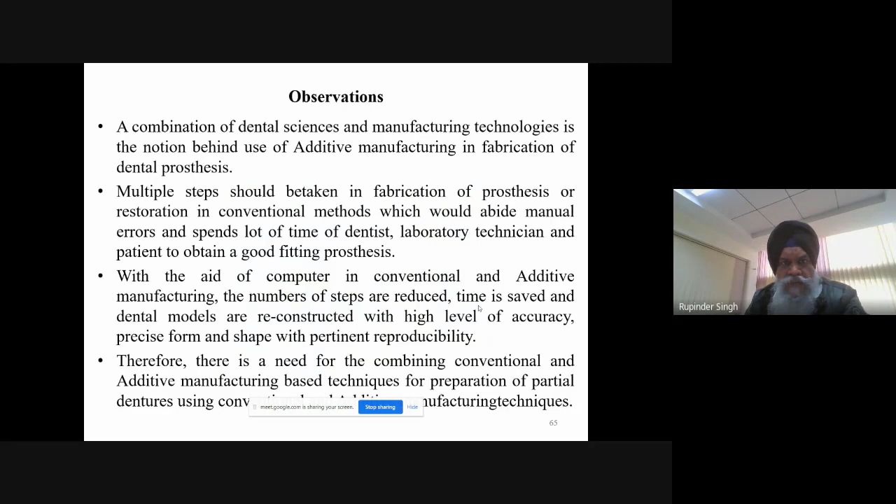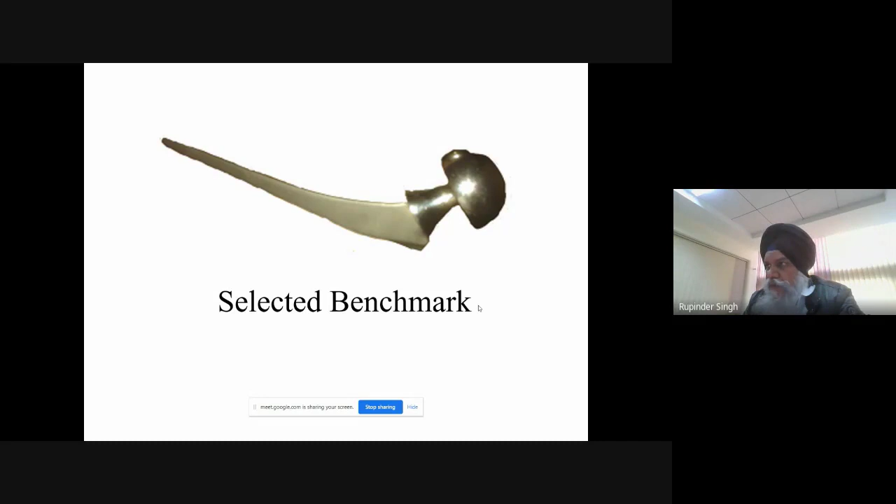Now, in the last case study, this is for preparation of some implants. This is the hip implant. In one of the recent cases, we tried to prepare these type of implants for a Labrador dog. This is the case for the human. You can see in this case there are different sizes.

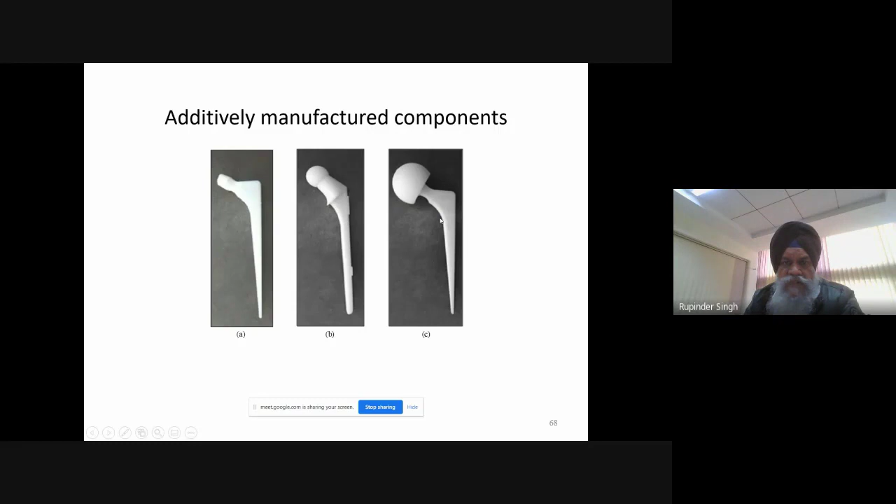This is for the 6 feet long male, different design for the hip implant has been there. Then, like a typical investment casting application, we are interested in the down sprue. This is the pouring basin, this is the down sprue, right? Then some connections in the form of runners and ingates have been prepared, and this has been joined with this.

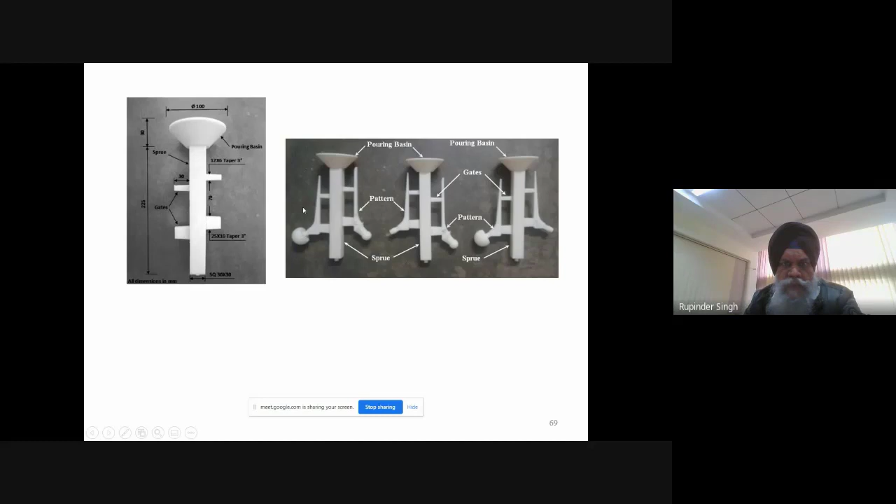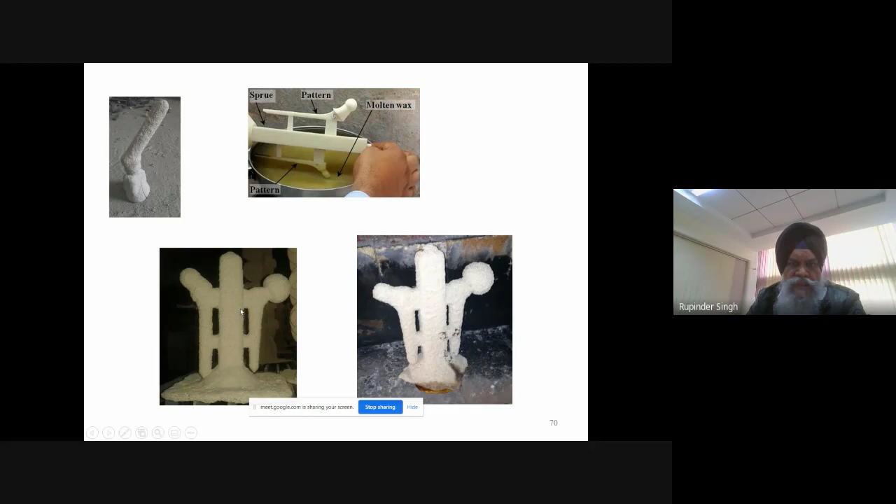Now this is putting the wax layer, then putting the slurry layers. So slurry layer is there, you can see over here. Then I am interested in the dewaxing stage, so basically after dewaxing, I am putting the molten metal. Once the molten metal is poured, I am available with the different...

stainless steel, basically 316L, has been prepared as a hip implant. This is a very common thing. But one of the limitations of using this type of material is like these type of implant materials.

Once I prepare through investment casting, assisted by some FDM, or using a metal printer, or biogel printing, one limitation is the part finally prepared has strength much more than the basic strength of the bone. So there is incompatibility as regards to strength. There is a problem of stress concentration, which we call stress shielding.

For that purpose, one solution is to prepare a hollow section or perforated section through which some osteoblast cells can grow and help in stress shielding. That is one of the best ways of preparing these type of materials.

Then some microstructure analysis has been done using optical microscope, under different settings we prepared, so there should not be dendrite formation, there should not be quick grain formation. As far as possible, cooling rate calculations were done so that I can get a honeycomb type structure. So this is all about the preparation of various implants for veterinary as well as human patients.